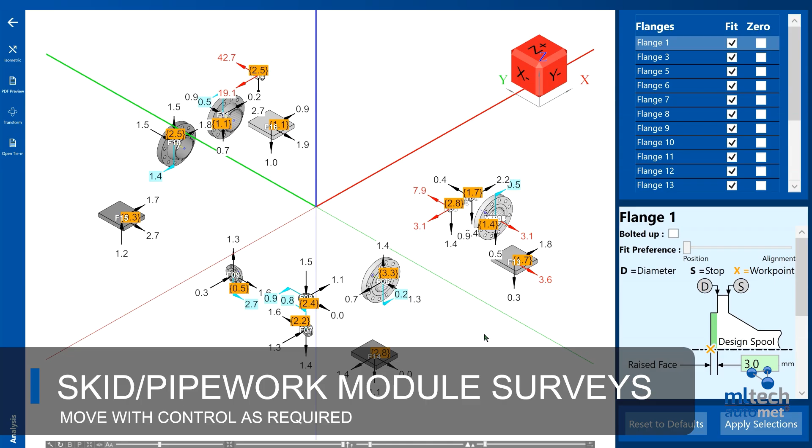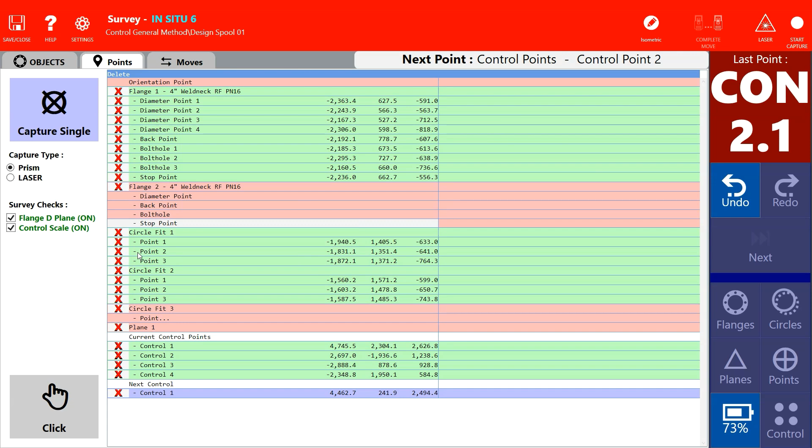Though Automet is primarily used for individual pipe spools, it can also be used to verify critical tie-in interfaces within skids and modules. To capture all the tie-ins, we may need to move the instrument or the skid. We can do this using the move command and a set of control points without compromising accuracy. See our instrument move videos for detailed information on how to do this.

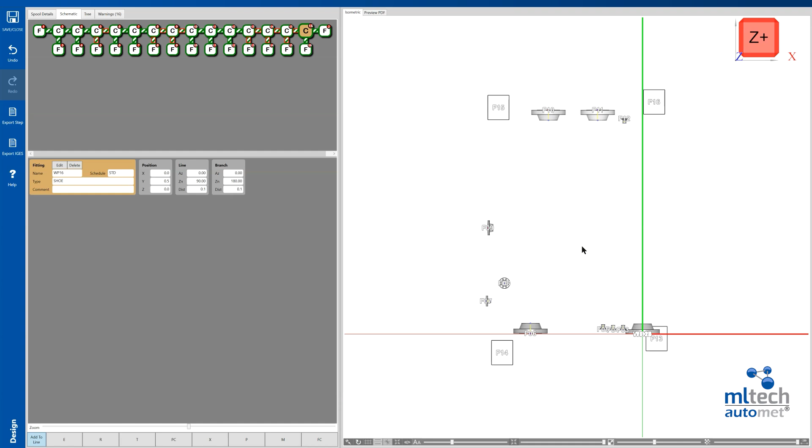Before measuring, design information must be entered into Automet. In contrast to a spool or vessel input, this technique does not include the pipe and fittings. The file contains only flanges and support base plates. We accomplish this by having the largest diameter flange as flange 1. We then declare flange 2 as a pipe end, with only 0.1 mm between the two flanges.

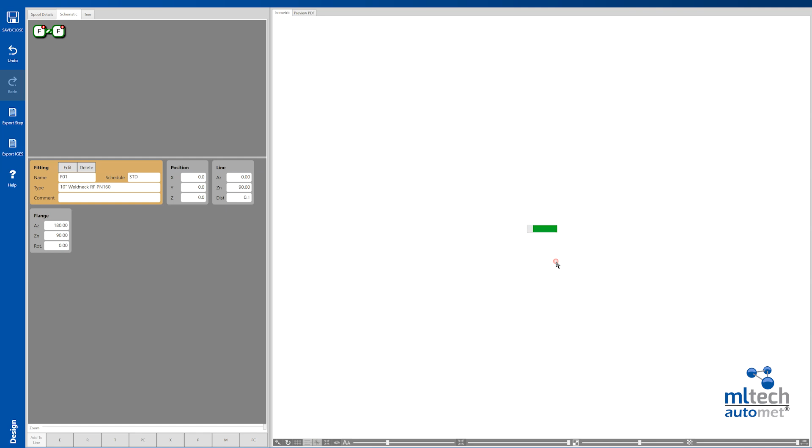All additional flanges must be entered as pipe connections. The procedure is as follows. Add a pipe connection. Declare it as stab in. Change the diameter to match the flange. Add a line geometry distance of 0.1 mm and a branch geometry that matches the ISO flange.

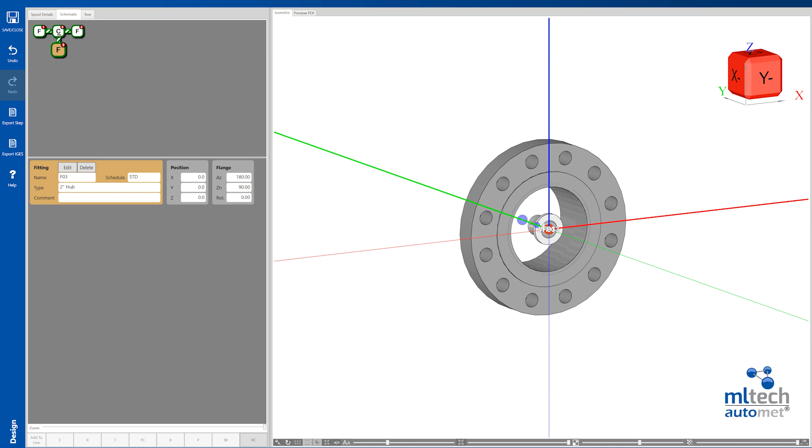We will need to specify the location of this flange using the offset geometry editor box. Before doing this, change the flange specification. You will need to work out the XYZ offsets from your ISO. Select rectangular and enter the values here. Repeat for each pipework tie-in point.

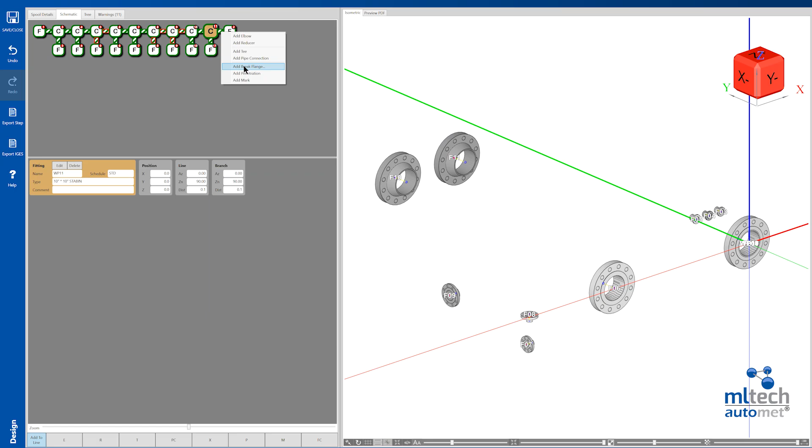Supports can be added in the following way.

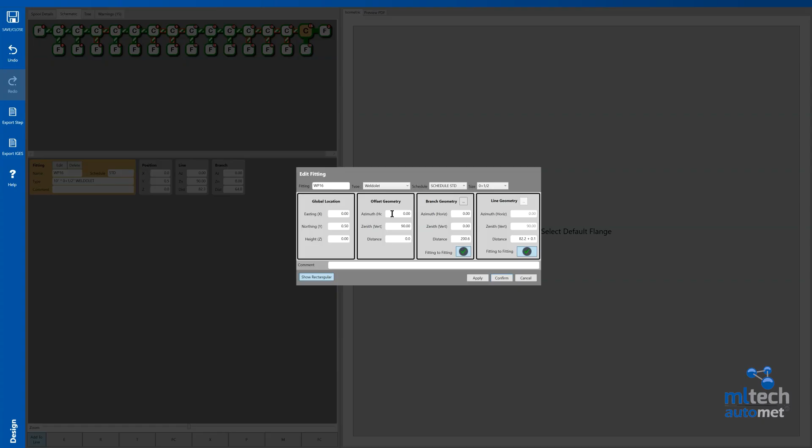Preview the PDF and export to see the flange specification, orientation, and coordinates.

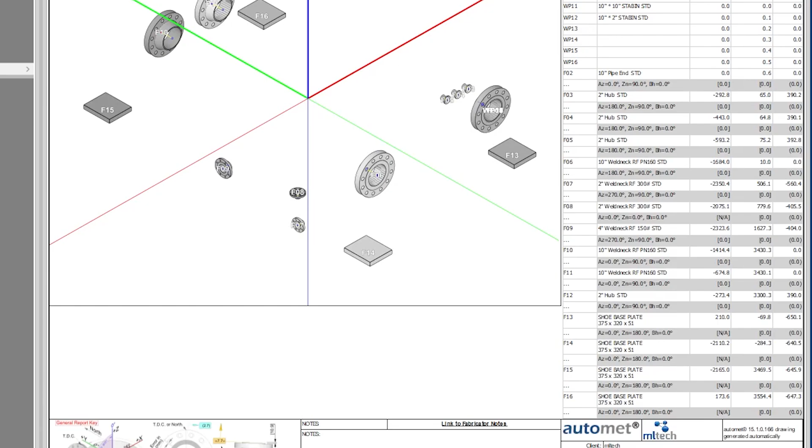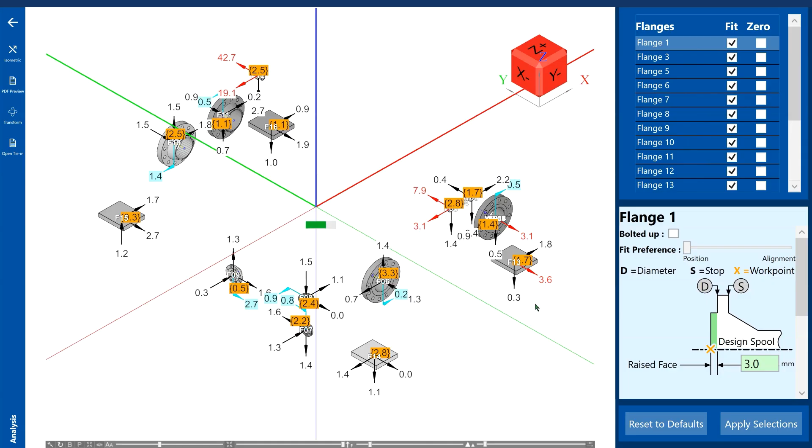Load this design file at the beginning of the skid survey and measure the tie-ins as required. Move the instrument as needed, measuring the control points at each new survey position. Create the visual report. In our example, there is a large error on flange 12. We remove this from the fit with this button.

Removing flange 12 from the fit further highlights the error at this flange and allows the other flanges to improve slightly. The reason this has happened is that Automet tries to average out the error on all the flanges set to fit. When we removed 12 from the fit, its error is no longer being included in this averaging process, and the other flanges improve. The assumption in this scenario is that flange 12 will be corrected.

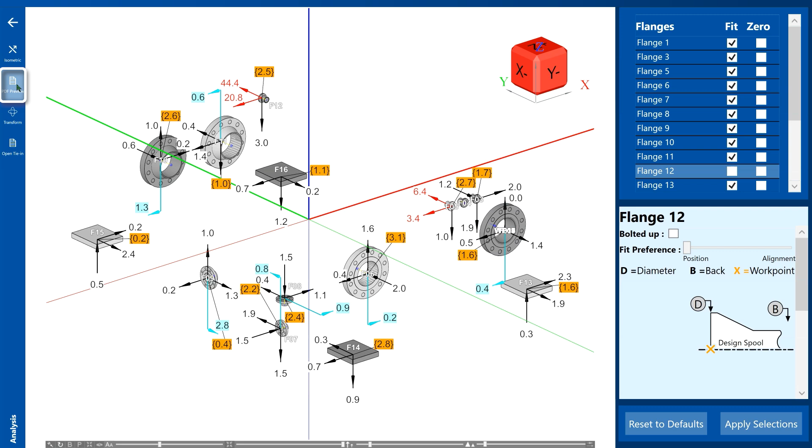Then, after tidying up how the report is presented, view your report here and export it here.